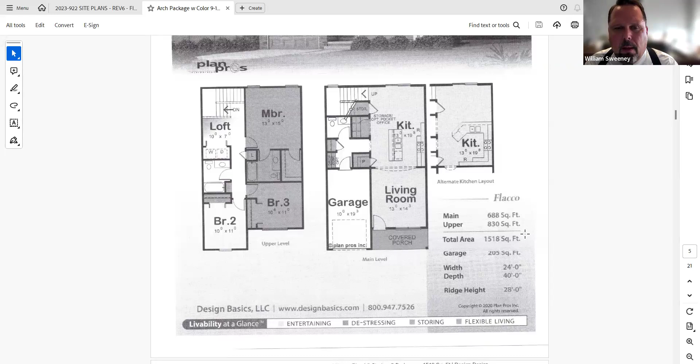We go to the next design, more information, just another version of the Flacco. And then we have the Craftsman style. What's nice about the Craftsman, it might be my favorite, is it's a single floor, single level living proposal. It's the smallest of our units, just around 1,200 square feet in the base model. We think this will be really attractive, particularly to seniors looking for more affordable living accommodations.

Again, we're looking for sort of classic looks. We're showing for all of our materials vinyl siding, vinyl windows. That's the look we're trying to seek. Very traditional. We're going to be using color palettes - showing very neutral whites, yellows. We expect to maybe do some light grays, but nothing that would look out of place in a New England community.

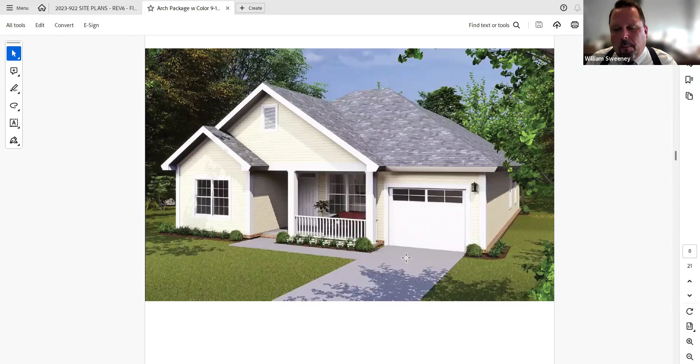If you go down some further, Joe, we've got some more elevations, and here we have a floor plan of the Craftsman. Again, modest living, at affordable prices, which is what we're trying to accomplish with this project. And again, this is a 3-bedroom design.

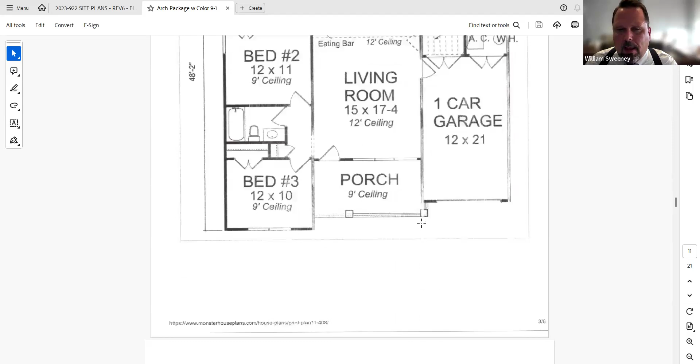We go on to the next design. This we call the Garrison. Unfortunately, we don't have a color version of this because it came out of a different designer. Very simple - this is our 4-bedroom design, 2 stories, using double hung windows with shutters. Very simple. Again, we think it'll be our largest building that we've offered, but we think there'll be some demand for it, and we've got a few of these on the site as well.

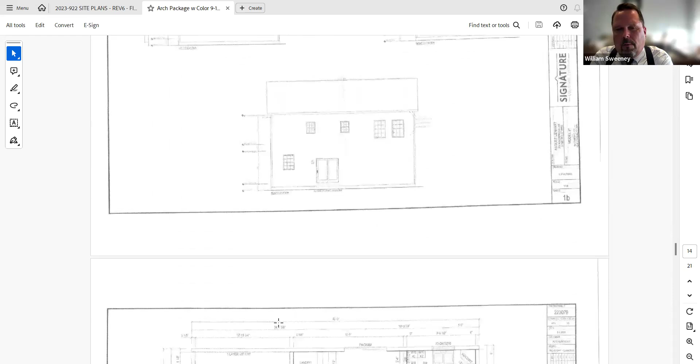If we keep going, I think we have a floor plan for this building. We've got the garage and utility room, living space on the lower floor. If we go to the next slide, you can see all 4 bedrooms are upstairs, including one with a walk-in closet. I think it's a very nice home, and again, I think there'll be some interest in this one as well.

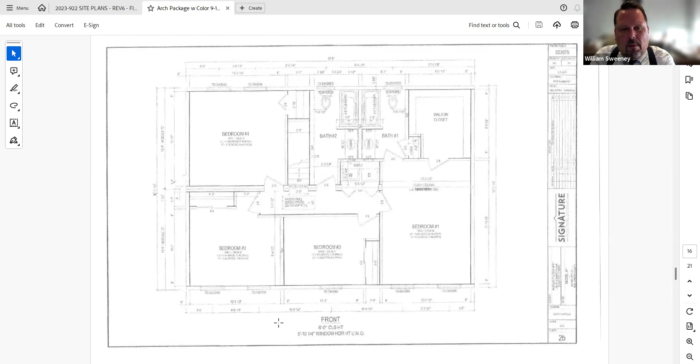And then if we go to our final design, this is our duplex design that we call the Elkton. You can see the 2 doors - again, very traditional design, double hung windows, shutters. We've got a little porch, portico type structure on the front, vinyl siding, asphalt shingles, vinyl windows. But these will be the affordable units. There's going to be a total of 4 buildings like this, 8 units of the 24 will be affordable.

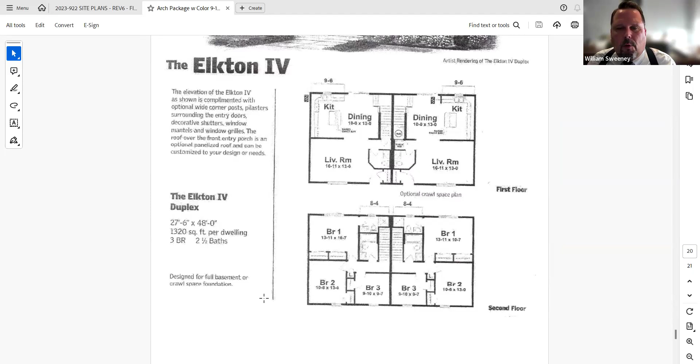And then we just have some floor plans as well, just showing the layout of these. These are 3 bedroom - each of the duplex units has 3 bedrooms as well. And again, just some basics - the sizes, the baths, the number of bedrooms. We have gas or electric heat, we haven't completely figured that out. And then again, vinyl siding.

And again, the affordable units are designed to really blend into the neighborhood. We're not trying to create some type of drastic difference between them. But the idea of these projects, when we have what we call mixed income projects, is you really create a true neighborhood type feel where people don't realize they're living next to an affordable unit - so different than how we did it 50 years ago, where we'd build like a single tower of affordable units, and everybody who lived there knew they had an affordable unit. The modern way is sort of mixing that into a traditional market rate neighborhood. It's a better way to absorb the units, and we think it'll be more consistent with the surrounding neighborhood as well.

Joe, did you want to take a little bit and just talk about landscaping? I know you have a plan - just talk very briefly about what we're providing for landscaping.

Going back to this colored plan, it's probably our best rendering that shows all the green spaces. The darker green areas are currently wooded, that would be left wooded. The remainder of the site has some slope that needs grading. To get the grading, houses, roadway, and utilities in, the majority of the site would be cleared, hence the light green spaces. Those are areas to be cleared, but then revegetated with probably some meadow areas and lawn.

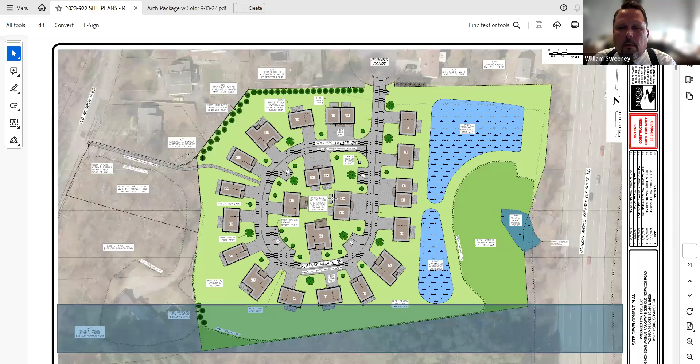Joe, can you answer that? I can try to, yes, on the site plan, to get to the right one, we do show a sign at the end of the cul-de-sac. Oh, okay, right, sort of right here on one of the plans. Okay, I didn't catch it. We have some more detail - it is here, we have a sign, like a stone wall type sign that says Roberts Village Drive, a plaque at the entrance. Okay, just for identification.

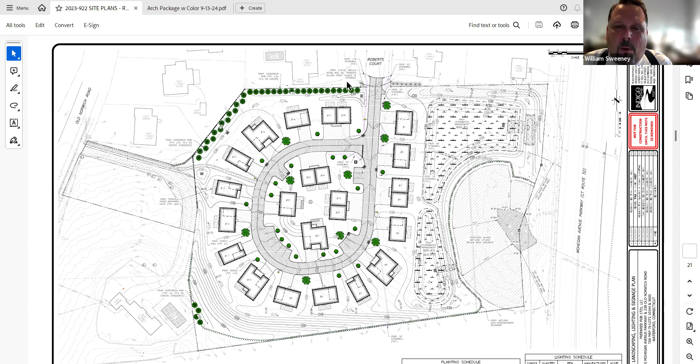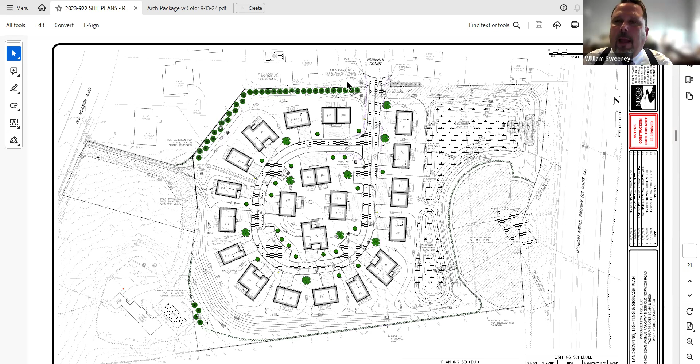Most importantly, for every unit of affordable housing built in the town of Waterford, Waterford gets that much closer to meeting its state obligation for affordable housing. The reason we can file an 8-30g application is because right now Waterford doesn't meet that requirement. But once 10% of your housing is deemed affordable, you don't have to entertain 8-30g applications anymore — everybody has to follow the zoning regulations from that point on.

Good, thank you Bill. Anything else, Mike? Nope, thank you. Okay, thanks. I'm okay with it. Okay, thank you for the presentation, Bill.

I think it's a very good use of a piece of property — really packing a lot of residents into a reasonable sized piece of property rather than spreading it out all over the place.

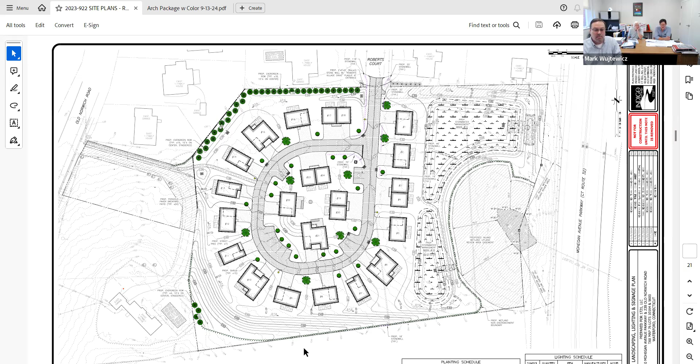My one comment: of the 4 designs, the Flacco and the Craftsman are fine, they're wonderful. The duplexes are a little less interesting, but the larger Garrison — if there's anything that could be done to add a little more detail there, they really seem to stick out in their blandness.

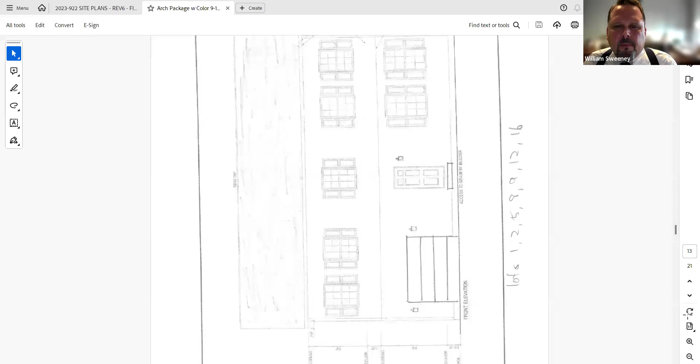Coming up, you're almost there on the drawing — yeah, there, that — devoid of trim, eave overhang. They really, and that they are a third of the units, and about 40% of the buildings in the project.

I think your project would definitely benefit from a little more attention to detail on this particular design. As a personal comment, I don't disagree with anything you said, and I will encourage my client to take a second look. I think particularly the entranceway could use some additional attention at minimum, but there's nothing I can say contrary to what you said.

Appreciate that. Bob, did you have a comment? No, just the Garrison — that second story overhang, it just seems like those were subdivision houses from, I don't know, 50 years ago. They seem kind of, they just don't make it, whereas the other designs are pretty spiffy. Yeah, there's a marked contrast between that one and the other 3.

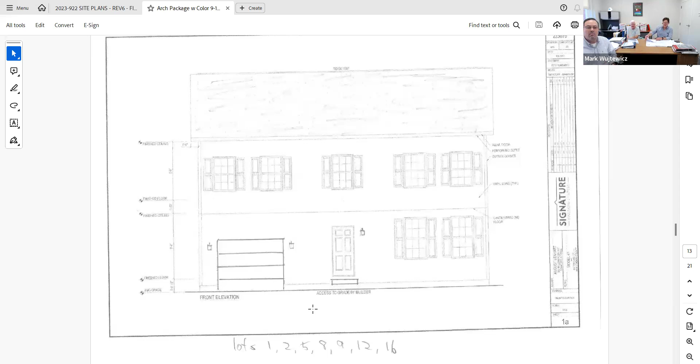That's our only comment, and as you said, you can take it or leave it. Just an opinion, that's all. Certainly appreciate it, and we take it coming from a good place. All right, we appreciate the time.

So we really don't have any recommendations, so do we need to take a vote? Yes, we still need to vote without any conditions or recommendations.

Is there a motion to approve the request of 1721 LLC? I will make the motion to approve. Is there a second? A second, thank you Mike. All in favor? Aye. Aye.

Let's go out. All right, thank you so much for your time this evening. Approved. Very good, look forward to seeing you again real soon. Very good, thank you. We'll see you, Bill. See you later. Thank you.